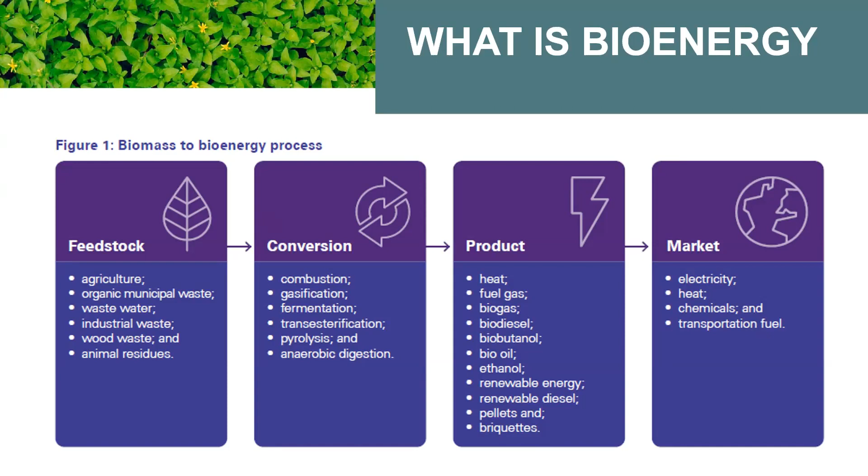Then in terms of the different feedstocks or fuel sources, going into a little bit more detail there, you can see where the potential opportunity is around the future bioeconomy. Now, one of the things that I didn't talk about in the previous slide was the bioproducts, biochemicals, bionutraceuticals, bioplastics. Really, as I said earlier on, anything that is currently being produced from a fossil base will in future be able to be produced from an organic base through a biorefinery process.

And we certainly do see that that is the direction that some significant global brands are going in, such as Coca-Cola and others. And I'm sure that many of you have noticed that now when you're buying washing detergent or hand liquid or anything along those lines at the supermarket, there are bio-based products, plant-based effectively, versus fossil-based products.

Okay, moving on from what is bioenergy, and you'll certainly dive into that a little bit more in the case study that's going to be shown. I'm going to talk a little bit about the drivers of the development of Australia's bioeconomy and what's really pushing the agenda. First of all, the really key one is the bioenergy roadmap that was announced in November last year, which is a Commonwealth project, and more recently, the technology investment roadmap that will be guiding the Commonwealth direction in terms of emission reduction and technologies to drive that. I'm not going to go into that because Matt is going to give us an overview and an update on the bioenergy roadmap.

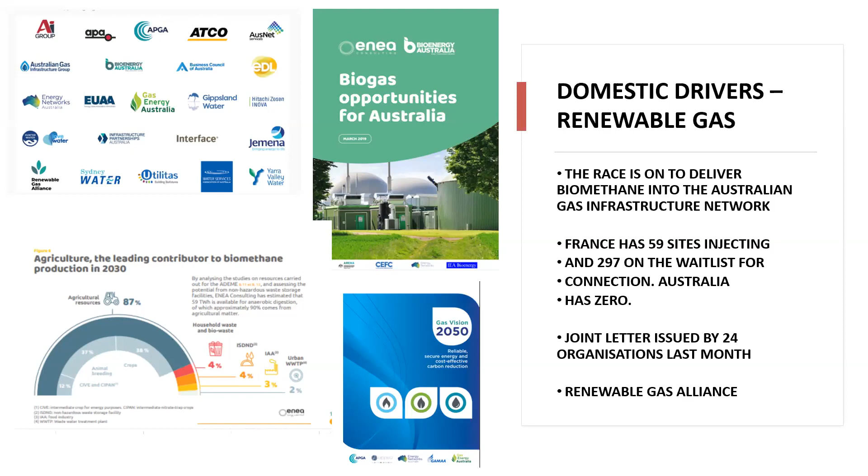Another significant driver in terms of moving into the future in Australia is, as I said, there has not been a focus on reducing emissions across the transport sector as there has been in other sectors. We've actually seen a 17% increase in emissions through that sector since 2005.

In addition to that, Australia is heavily reliant on imported crude and also refined products. Looking at the situation into the future, as an example, if we had an E10 mandate across the entire country, as it operates in the US or over in Europe, you actually fill up your car and ethanol is the octane enhancer. So it's present in every grade of fuel - it isn't one specific fuel.

If we were to have something such as that, it would provide an 18% increase in our basic days of fuel security that we hold for the passenger vehicle fleet. In addition, as I was saying earlier, renewable diesel being a 100% drop-in diesel and being able to be produced from end-of-life, non-recyclable plastics and the like, presents a significant opportunity, moving into other sectors such as aviation fuels as well.

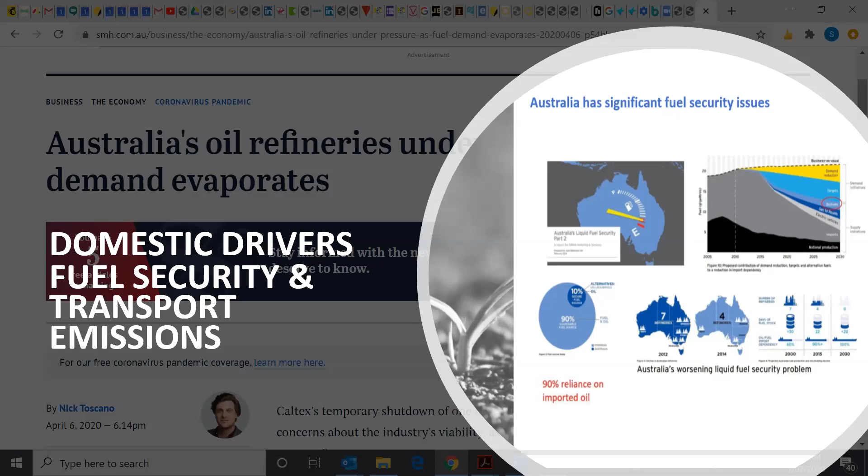Another significant driver that we've seen over the last 12 months has been a significant shift in the mindset of government, but also citizens, through things such as the War on Waste program and other initiatives, so there is now a focus and a spotlight on waste in Australia that really hasn't been present before.

So we're able to support the agenda around reducing waste, around diversion of particularly organic wastes that produce those significant methane components currently going into the atmosphere, and utilising those for a higher value product - potentially, if they're going into an anaerobic digester, capturing the gas from that facility, but also being able to have, as a byproduct, this incredible digestate product, which is a fantastic agricultural fertiliser and enabler to assist with soil, drought resistance, and a range of things.

I couldn't really, at the moment, if we're talking about domestic drivers, ignore COVID and the economy and where things are sitting. I think we can safely say there is a bit of a shift in thinking currently in Australia around creating a level of self-sufficiency, a reigniting of domestic manufacturing, a focus on regional areas and regional communities and jobs, and transitioning.

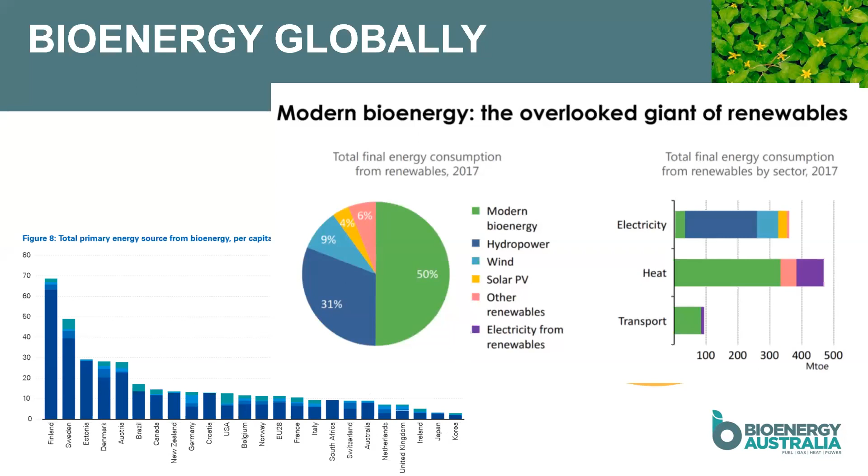Bioenergy globally, where do we sit? Fifth from the bottom, sixth from the bottom. So we sit down here. We're a long way behind, but the really important benefit there is that it means we have a significant opportunity to grow. We are considered the low-hanging fruit in a global context for a lot of the significant global developers.

I'm going to skip through that because I'm running out of time, but we released the KPMG State of the Nation report in 2018, which showed a bit of a breakdown of the current bioenergy projects that are operating. There has been a significant increase since that point in time, and our plan is to release an updated report next year.

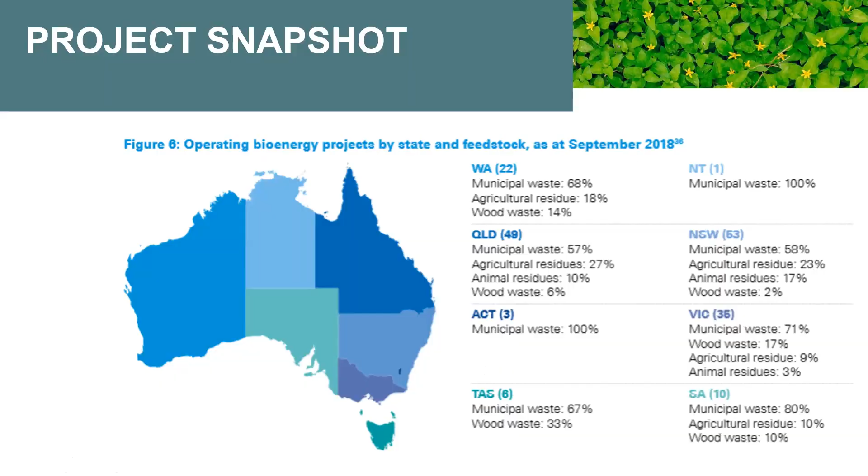Thanks very much, Shahana. So do you know whether Matt's going to pop on now? Have you heard from him? Is he not on? You haven't seen him? I haven't seen him pop on, but maybe we can work with that in the background, and Matt might be able to give us a bit of an overview of the bioenergy roadmap with ARENA once he's available, after we get to hear from the Frontier Impact Group.

Heading up the Frontier Impact Group for today is Jennifer Lauber-Patterson, who established the Frontier Impact Group to drive the business and economic benefits of environmentally sustainable investments and strategies. Jennifer is also joined today by Mel Campbell, who's going to be talking on the technical and financial side of the bioenergy project they're working on.

Thanks very much. Thank you so much, Genevieve. I'm in lockdown in Melbourne at the moment, and the reason I've got this background is it's where I'd actually like to be. I think it'll be a long time before we get to go to some tropical beach overseas. But the positive is getting lots of work done in lockdown.

It is a real pleasure to be speaking to you today on the Renewable Fuels project for Collie. There are a lot of fantastic benefits that are going to be provided for the local community, which we'll share with you shortly. At Frontier Impact Group, our focus is very much on impact projects that have an impact on the environment but also grow regional opportunities and jobs, and we think this project will do that. So if we move to the next slide, these are the benefits that we believe it will provide Collie. Next slide, Mel.

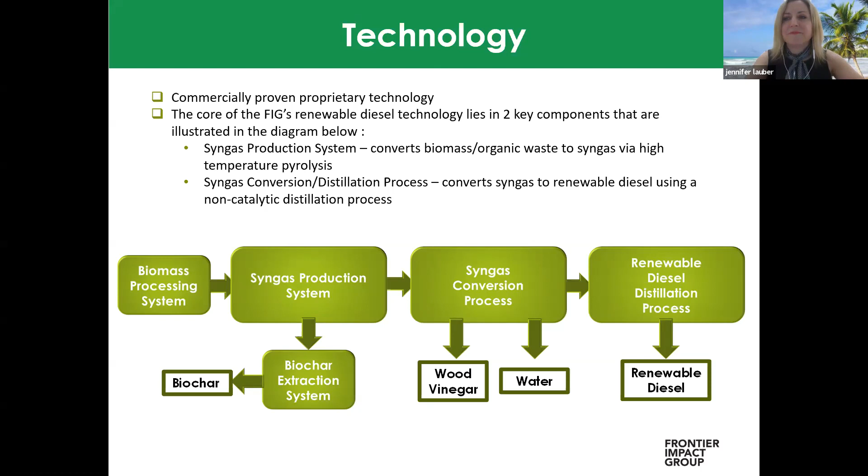Just a few highlights, and I won't go into some of the ones I've already mentioned, but 18 million litres of renewable diesel it will initially produce. And as we've mentioned, we could add another 18 million subject to biomass availability on that site. 8,300 tonnes of high quality biochar and graphene, which Mel will speak further about, and 6.5 million litres of wood vinegar that can be very beneficial for use in agriculture in WA.

There's a utilisation of 55,000 bone dry tonne equivalent per annum of biomass. So that's what's needed, and that's relatively small compared to some of the bigger plants that have a Fischer-Tropsch type technology. But I think this is an advantage because a key aspect of the cost is the distance in terms of supplying the organic waste streams. So the closer you can be to the site, the better. The smaller it is, the closer you can be to where it needs to be. It's a net production of water rather than consumption of water.

Large economic benefits, including direct employment of 35 to 40 FTE staff, as we've mentioned. It's low emissions, and it can be even carbon neutral or carbon negative, which is fantastic. Capital investment of around $100 to $110 million. We're getting work done by an EPC contractor at the moment that's doing more modelling to get more precise numbers for us. And we're estimating the return on capital at this stage to be 23%. So it's also economic. Performance insurance: we're looking at an insurance company that has seen the technology we're using and can also provide a performance guarantee on that, which is gold when you're starting to deal with banks.

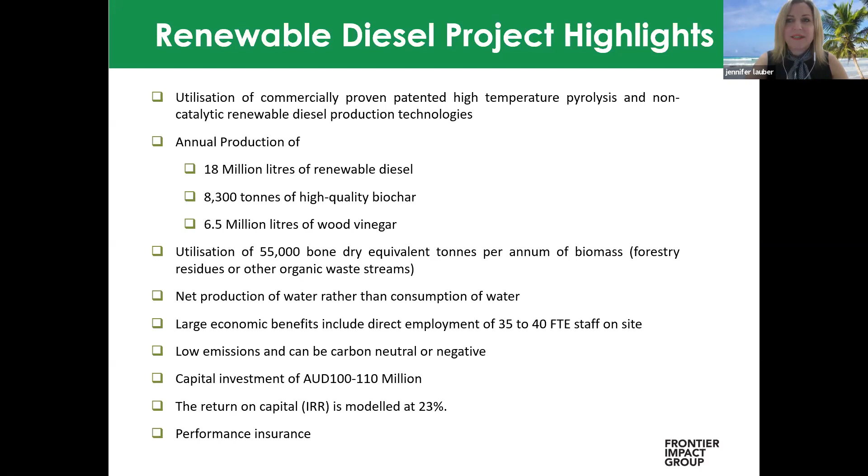Next slide. What I just wanted to move on to quickly is the project status. One comment I'd really like to make is how wonderful it's been working with the people in Collie. Wendy Purdon has been managing what's called a timber hub in the area of Collie, and she's just been so supportive, and it's great to be supporting her larger project and being part of her timber hub. Also the WA government, Kim Brooksbank and many others, and also the Forestry Commission, they've been absolutely amazing.

And we are looking forward to one day being allowed into WA and being able to visit you. The other aspect that was a bit challenging for us: we were going to organise a tour in the US, but it's now going to be a virtual tour.

But the positive of that is there'll be more people to be able to participate. So we'll have someone that will be walking around showing us all the bits and pieces and how the plant actually works, which I think will be a lot of fun and something very different.

Site assessment, we've now got 3 sites and we've got about 20 different factors that we're considering on those sites, but we're doing a very detailed due diligence, and Mal and Sugi and our team have been doing an incredibly good job around that.

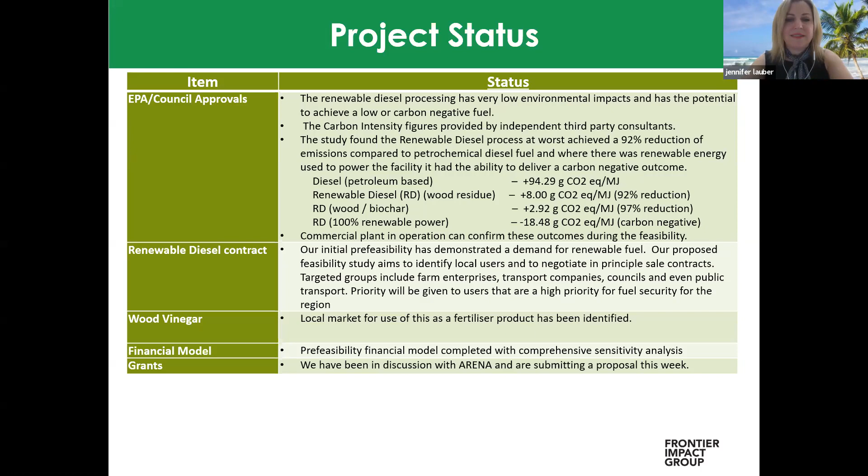And grants, we've had some discussions with ARENA, and we are submitting a proposal which we think will get in place this week, which is pretty exciting. Now, what I'd like to do is pass you on to my amazing colleague, Mal, and he'll talk to you in a bit more detail around the technology, but also about some of the co-products that are generated from the process, and they're some of the most exciting parts of the project as well. So over to you, Mal.

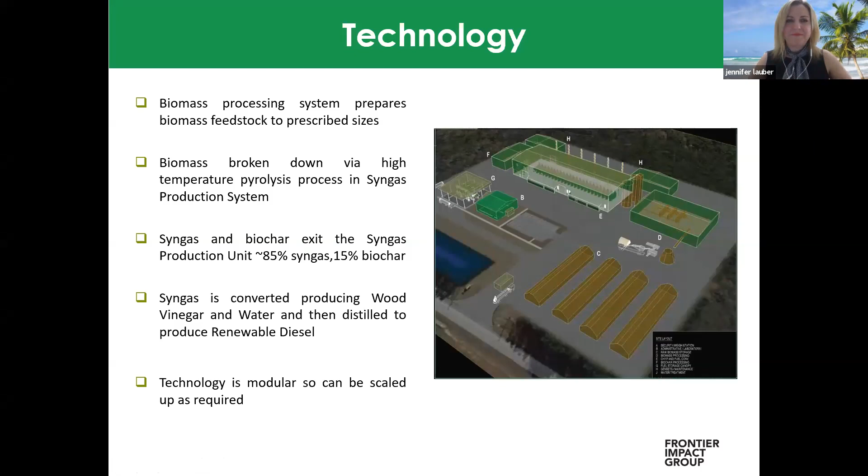Thanks, Jennifer. I'll just carry on, and thanks so much to Shahana for setting the scene for a lot of the information that we've been able to share with you, and also Jennifer for giving me a very good lead into this. So I'm going to go through some fairly boring stuff. I'm not the most exciting presenter, but the two ladies have done a wonderful job in front of me. So I'll give you some facts and figures and some numbers, for those people who are interested in those types of elements.

Just in terms of the technology, that's an overlay of an 18 million litre per annum plant of renewable diesel. It consists of 4 modules. So while Jennifer said that you can actually replicate a plant next door and double the capacity, we can actually set it up to add 1 module, 2 modules, 3 modules, however many modules.

We could have done a 1-module plant, which would be significantly cheaper when we did our first project, but we decided to do a 4-module plant to get reasonable economies of scale on the first project. So being very modular and very scalable has a lot of advantages in terms of locating and sizing the plant to the available biomass resource. So that's just a general layout.

The site itself, that's an area of about 2 hectares, that layout, and the site we're looking at in terms of processing, we're looking for probably 5 to 10 hectares. It depends how much on-site storage of biomass we need, and how the biomass is delivered. So we'll be putting wood chip into the pyrolysis units, and we may process the wood chip on site. We may process it off site. So we're still working through some of those logistics with the sites and with various parties in the southwest of Western Australia.

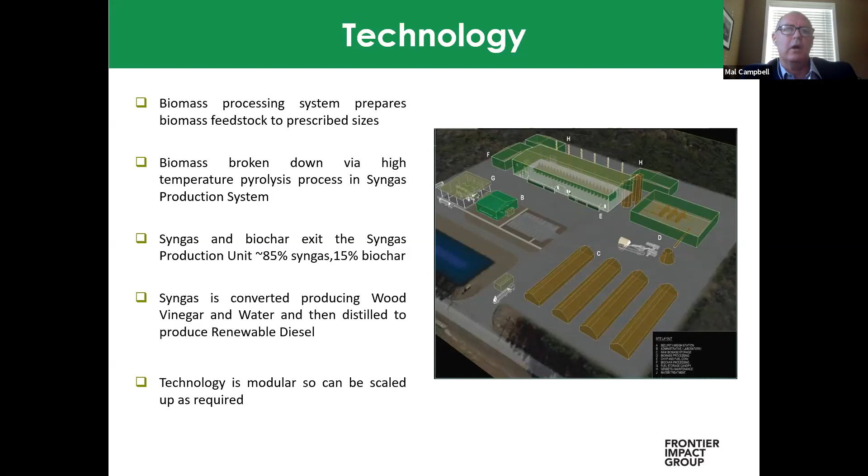Renewable diesel, already gone through that, so I can skip that slide quite quickly. Shannon mentioned about 80 cents per litre we've done in our modelling. People keep asking me what's the levelised cost of energy of the plant, and it really depends on how much we're paying for our biomass, how much we are getting for our other products, because we've got quite valuable co-products, which I'll talk about in a moment, which mean that we're not just relying on renewable diesel, because we're also getting significant revenue from other products. So that differentiates us.

And also we've included a reasonably high cost for our biomass to make sure that we can secure that biomass or produce energy crops at numbers that mean the biomass feedstock is sustainable for the long term. And many of you who have been involved in the biodiesel industry over a long period of time would know that there's been a significant number of issues and failures of projects just because they couldn't secure long-term economic cost of feedstock.

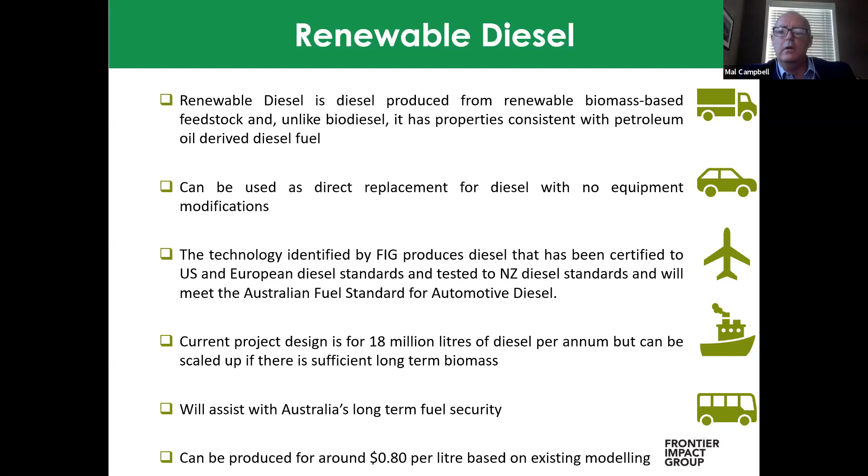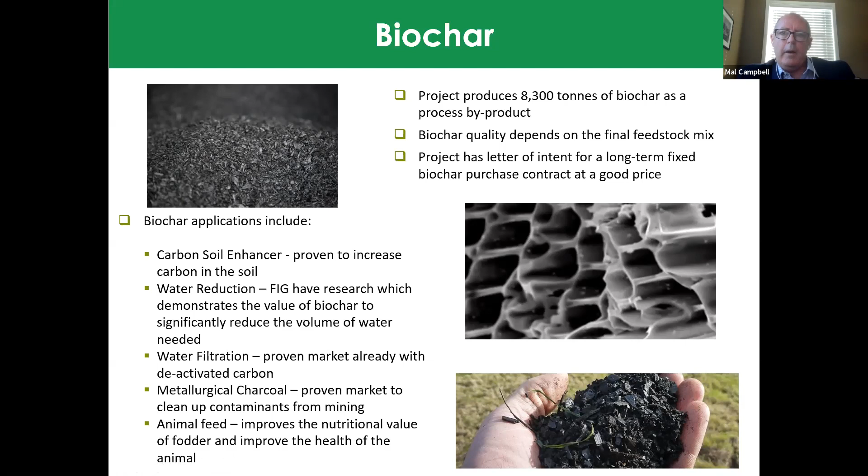So the major byproduct is biochar, and many of you will be familiar with biochar in its own right, and the advantages down the left-hand side of the screen there. The distinction in this particular product is that with the right sort of woody biomass feedstock, we can produce biochar which has got a significant quantity of graphene in it, up to a 70–75% graphene component. And because of that biochar quality, we've got a project that's got a letter of intent for a long-term fixed biochar purchase contract at a very good price. That market's only going to grow, as I'll explain to you shortly.

Graphene, for those who aren't familiar, is basically a single atomic layer of carbon. Currently the main way in which it's produced is to mine graphite, and extra refining is done on that graphite to then produce graphene. Now, 99.99% pure graphene costs between $2 a gram and $8 a gram. Given that we've got 70% graphene in our biochar, it'd be nice to get 70% of that price. We've got a reasonably conservative estimate of that biochar value; even based on the contract from that international buyer, we've modelled a lower biochar price than that.

The graphene's got all those qualities shown in the left-hand column, which make it the next super material. Some of the applications include high-strength building materials. There's been some research where they mixed 75% pure graphene from one of our pyrolysis units with 99% pure graphene, at about 5% to 95%. And the combined strength enhancing was higher than that of the individual materials. So there's some synergetic relationship, which they haven't been able to explain yet, between our graphene and the pure graphene.

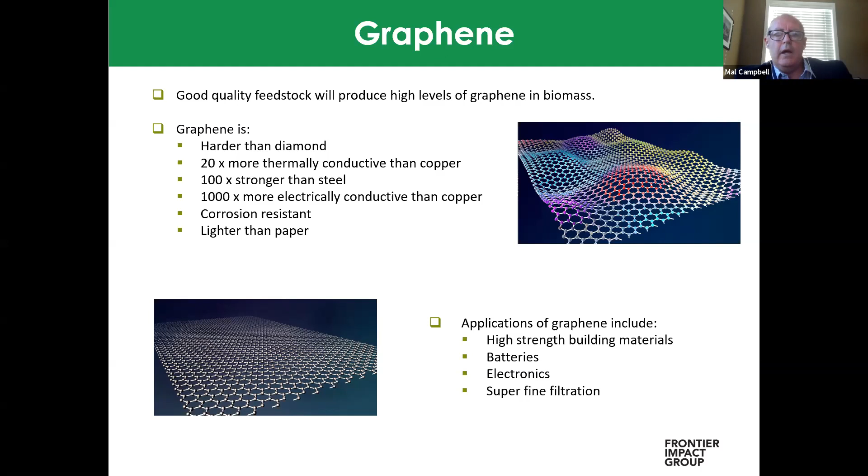For pure graphene and for high quality and probably high concentrations, not necessarily pure, applications such as batteries. Many of you might be familiar with graphene batteries, probably the next generation of batteries. In electronics, because of its superconductivity, the ability to use graphene in electronics, and also in superfine filtration. It can be used for filtration purposes.

The other product is wood vinegar. None of you might be familiar with this. It's a byproduct of burning wood. We don't necessarily have to produce wood vinegar. We could produce a grey water and dispose of that. But from our perspective, we've got the ability to produce wood vinegar at a very cost-effective rate. The quantities that we're producing will probably swamp the world market for wood vinegar. In fact, that's definitely the Australian market.

So we've got a very conservatively low price on that in our financial modelling. In fact, our model still works without the sale of wood vinegar, but we want to make it as environmentally sound as we can as a project. So it's got a huge value as a byproduct to assist in fertilising. It's not a fertiliser in its own right, but it actually will assist in the uptake of fertilisers, and a number of the other benefits are there.

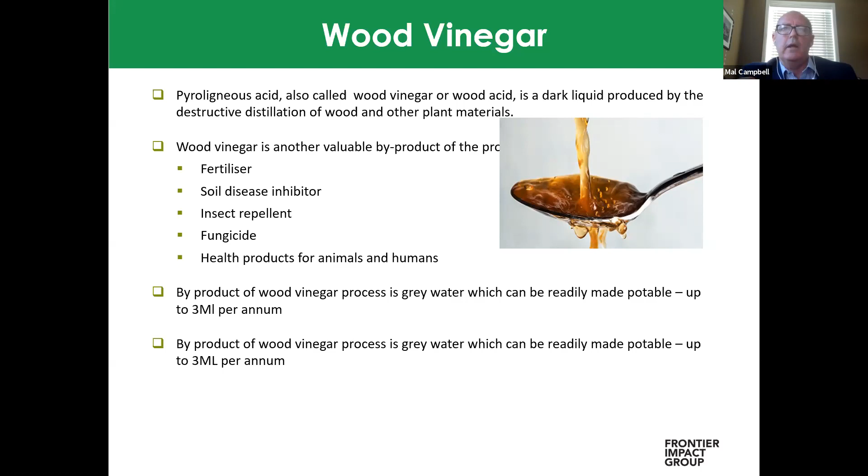We'll also be using the 3 megalitres of water that the plant produces. We'll be making that potable water. So we're going to make it a very environmentally sound outcome. And these are the next steps: basically community engagement and communication on the projects, part of which is today's session. Finalise the site. We've got 3 sites. We're progressing discussions with EPA and Council.

We've got an EPC contractor putting together some designs and costings for the Australian situation. We've been working on budget costs based on US prices. So we're basically going to the stage where we're paying an EPC contractor to firm up our numbers. We're looking to negotiate long-term fuel supply agreements, and we're also looking to potential new business opportunities for users of biochar, graphene and wood vinegar, so that we can value add in Australia, rather than have to sell them overseas and get other people to value add.

We're looking to finalise our feasibility and financial resources at the end of this year, with a view to being in construction mid next year. So that's our project. Thank you.

Thanks very much, team. That was fantastic. I feel like I know so much more about the bioenergy industry in Australia. And I think it's been a while since the Australian Institute of Energy has hosted an event on bioenergy, and it's great to see how far the industry has come since last time we hosted everyone.